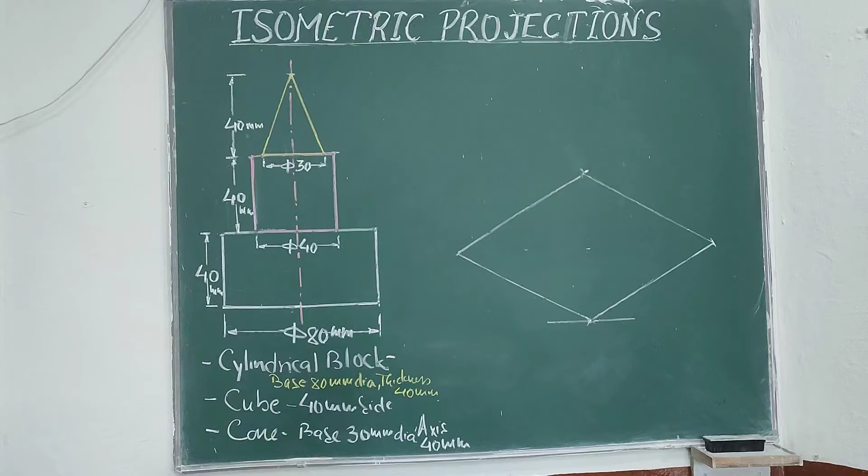Hello students, so here once again I am with another lecture on isometric projection. Again I am taking multiple solids. This time I have taken 3 solids, and if you look at this figure, this is the orthographic arrangement of these 3 solids. The lower side there will be a cylindrical block whose base will be 80 mm diameter and thickness I can say, because its height will be lesser than the diameter, so thickness will be 40 mm.

Above it I have placed a cube of 40 mm side, and above that cube there will be a cone of base 30 mm dia and axis 40 mm, and all the solids will be kept in such a way so that the axis of all the 3 solids will be on the same line, and that is perpendicular to the horizontal plane.

So I am going to draw isometric projection or isometric view of these 3 solids. If you want to go for isometric projection, then you reduce the length by 9:11. If you want to go for isometric view, then use the true dimensions. So I have drawn this front view only, and with the help of this front view I am going to put the dimensions on the figure.

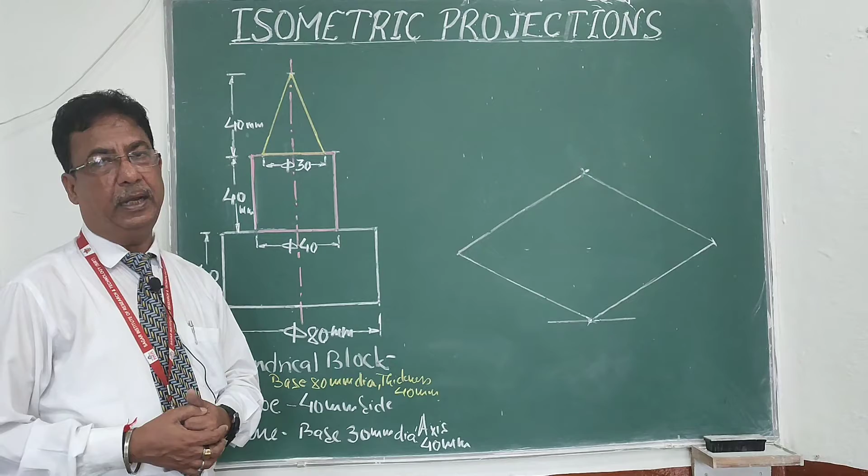As you know, we will start with the lower solid, that will be a cylindrical block, and the cylindrical block's base will be a circle of 80 mm dia, and that circle will be inscribed inside a square, and the isometric projection of that square will be a rhombus. So I should begin with that rhombus actually.

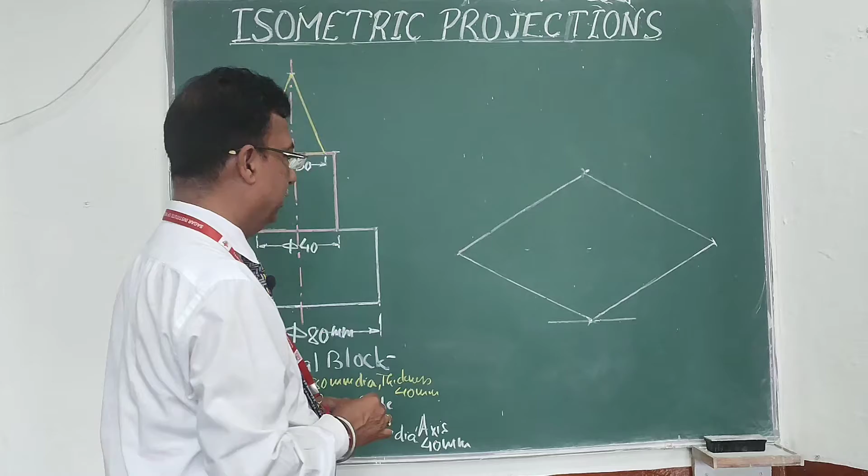So I have drawn that rhombus in this figure, and the dimension 80 mm I have taken from here, as that will be the top view. So I have used these two 30-30 axes, and with the help of this I have already marked this rhombus of 80 mm size. After that I am going to use one method that is known as 4 center method to draw the isometric of a circle.

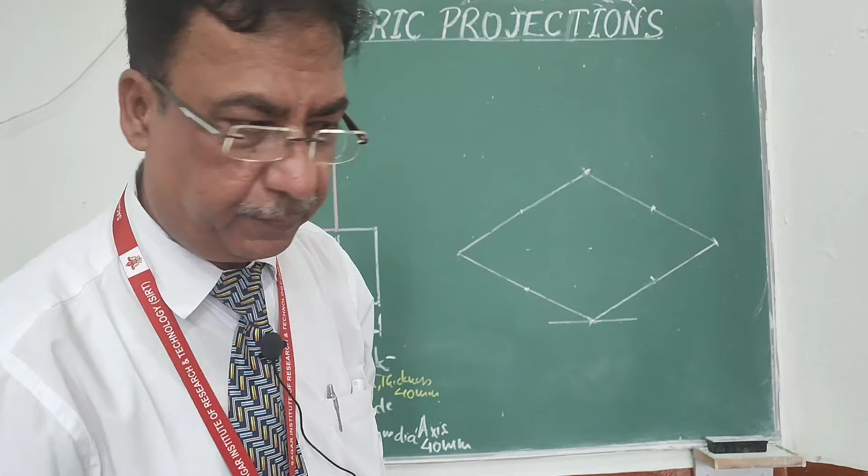So that method will be like this. Initially I am going to mark the midpoint of all the 4 sides of the rhombus. So initially I have marked the 4 midpoints of all the 4 sides of this rhombus. After that, from the corners of the shorter diagonal of the rhombus, I will join these points with the help of straight lines.

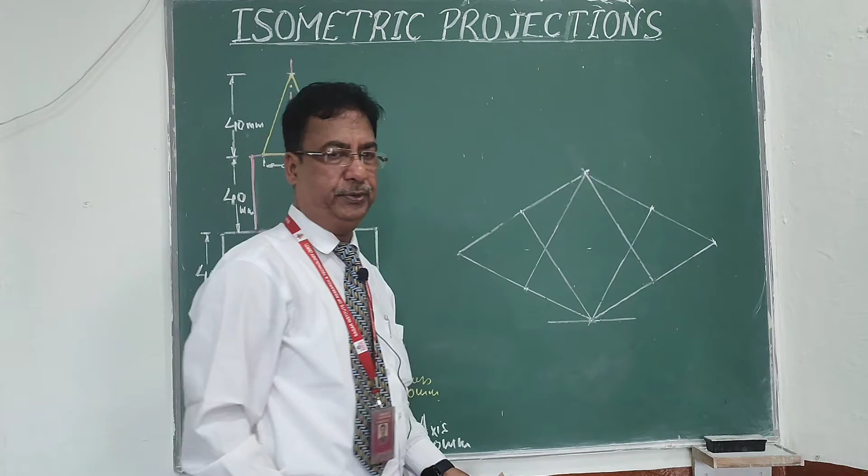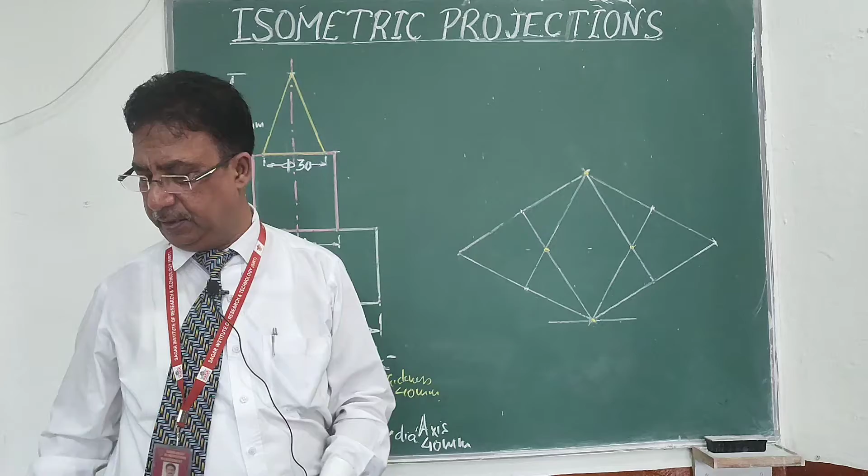This method is known as 4 center method. Actually we will get the 4 centers for drawing the ellipse, that will be the isometric projection of this circle, and the 4 centers will be like this. The first center will be this point, that is the corner of the shorter diagonal, and this opposite corner, and these 2 intersection points will be our centers. So 1, 2, 3, 4, these are the 4 centers, and with the help of these 4 centers I can easily draw, with the help of compass, my ellipse.

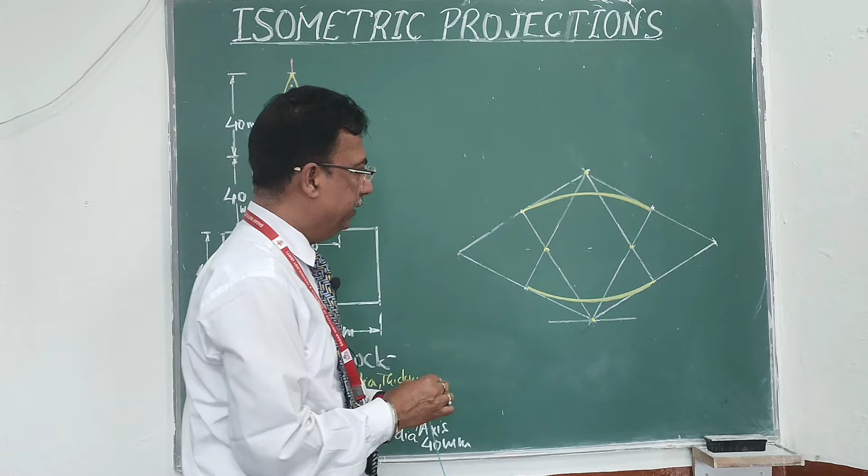Take the first center, and this total length will be the radius, and you know that this length will be equal to the opposite length. So draw an arc of this radius, that will complete this much portion of the ellipse. Same way from the opposite corner, this is the length, you can check both the lengths will be similar. So draw this arc. After that, this will be the third center, and this much will be the radius. You can mark this.

Now using the last center, this will be the center. You can easily draw. This is one of the easiest methods to draw isometric projection of a circle, that will be an ellipse. So I have drawn this portion. This is the upper part of our cylindrical block.

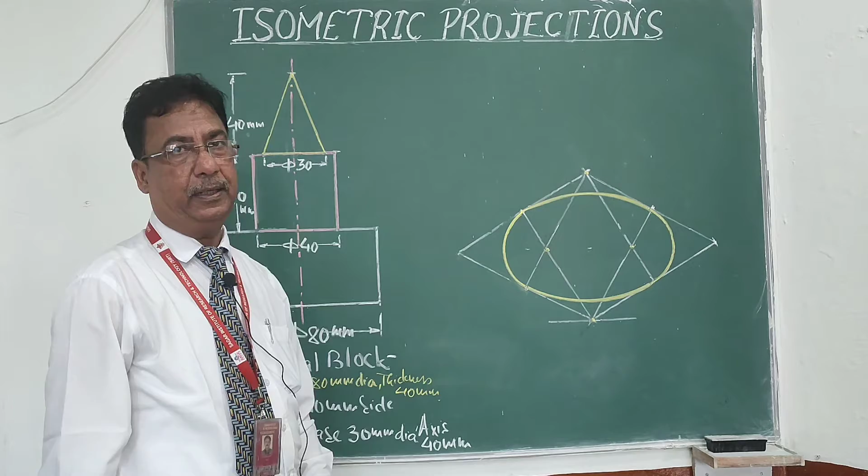Now for the lower part, either I can go depth wise and draw another rhombus, or because the height of the cylindrical block is very less, from these centers I will shift perpendicular downside 40 mm, so that I can get the center for the lower part. So from this center I will go downside 40 mm, same way from this center, and finally from this center. The upper 3 centers will be useful for me. I can shift downside and pick this length 40 mm.

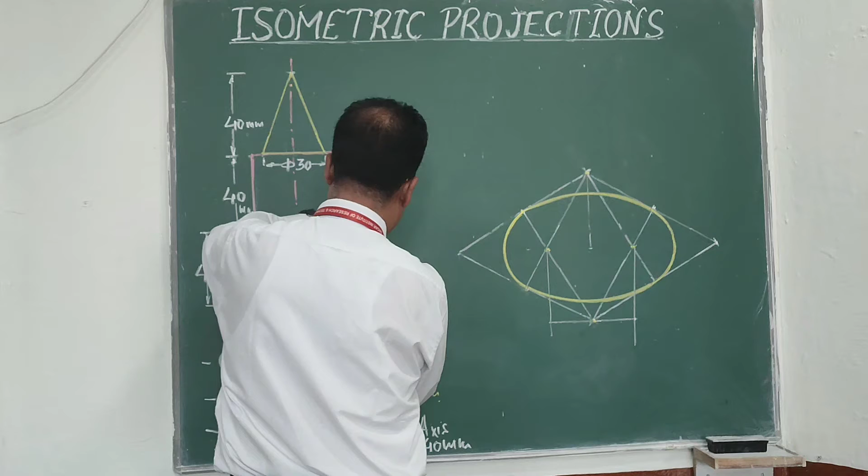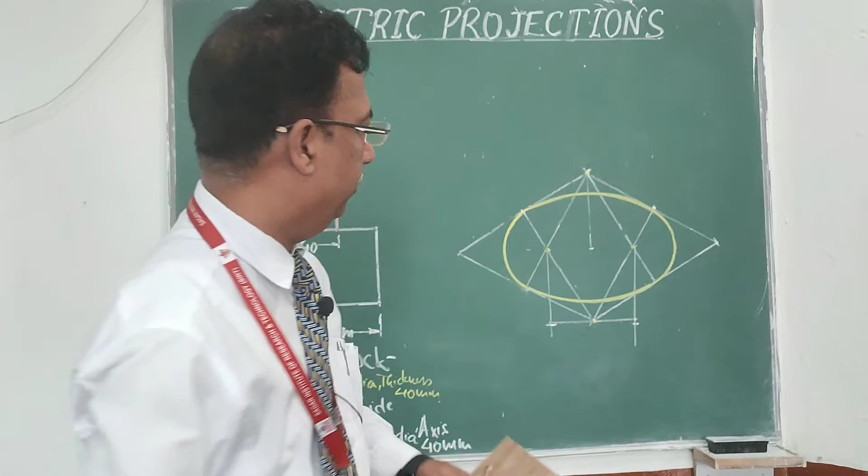So 40 below first center, second center and third center, and also as this curve will be from this point to this point, from this point you can shift perpendicular downside so that you can get the position of the arc.

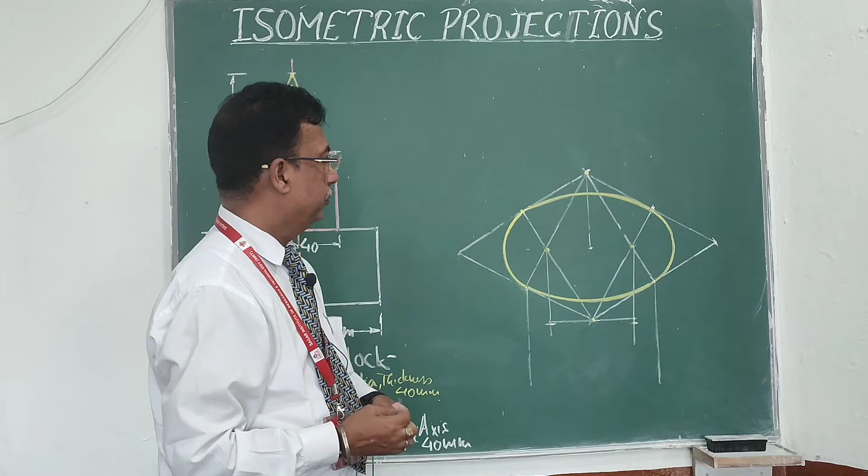Like this. Now I am going to use these new centers 1, 2 and 3. The radius will be the same as for the above curve. If you remember, we have taken this much radius. So from this center I will take the same radius.

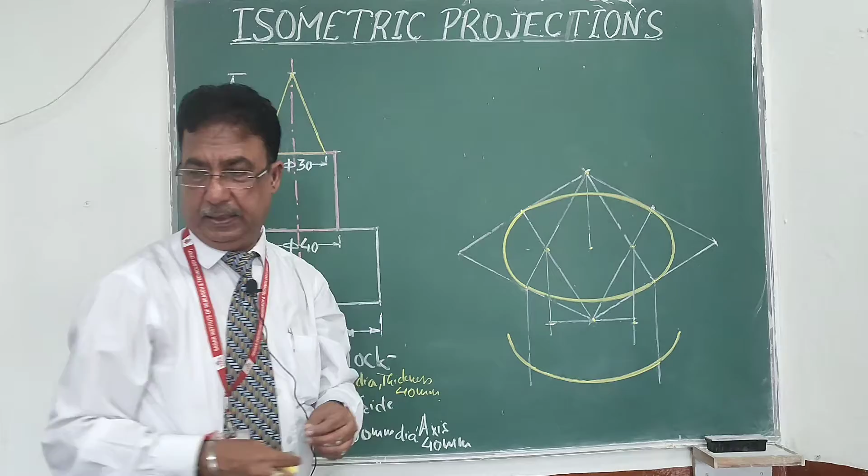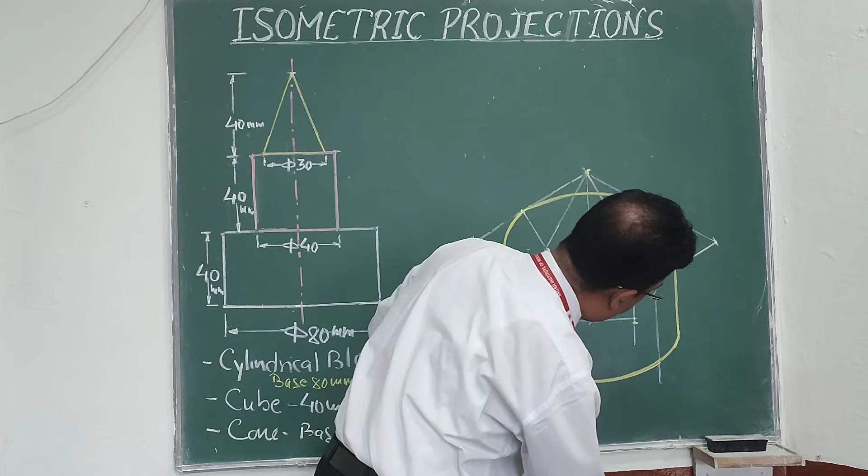Same way from this center we have taken this radius, so same way I can use this one. Same from the opposite side, you can go like this, and after that tangentially join this. No need to draw the dotted portion, as already I discussed with you. So this will be the portion of the cylindrical block. So now I think the cylindrical block will be completed.

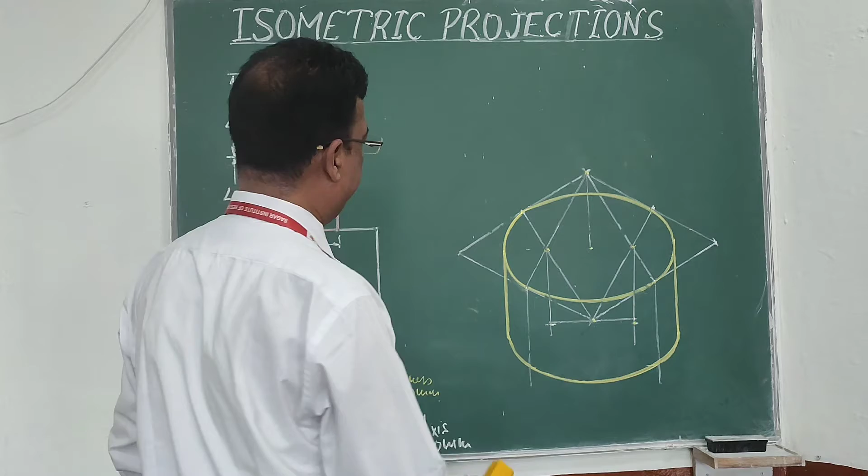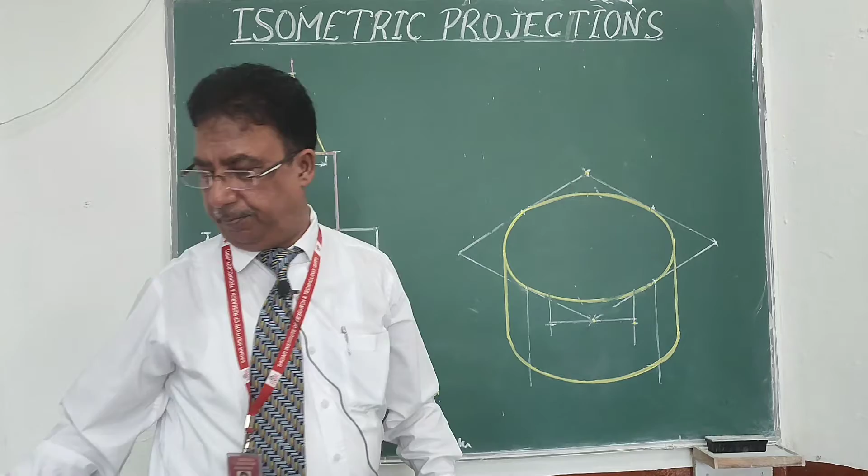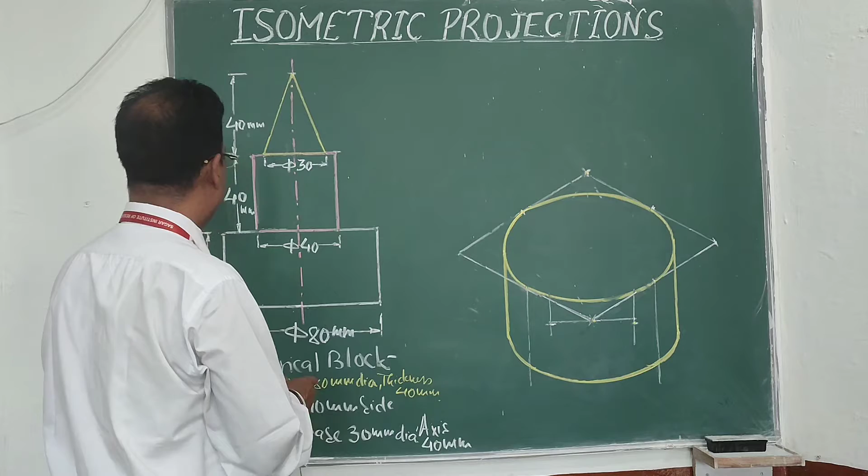So if I shift 20 mm inside the figure, 20 from this side, 20 from this side, remaining will be 40. Same way 20 from this side, 20 from this side, again 20 and 20, and 20 from this side also. So what I have done, from all these corners I have shifted 20 mm inside.

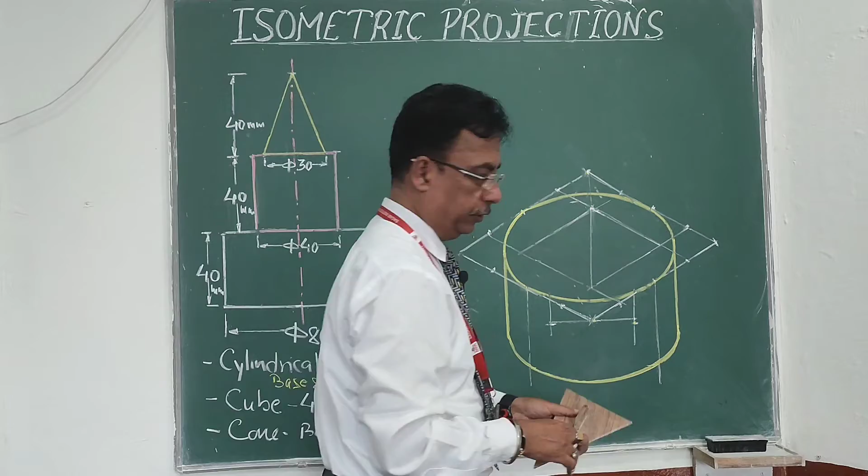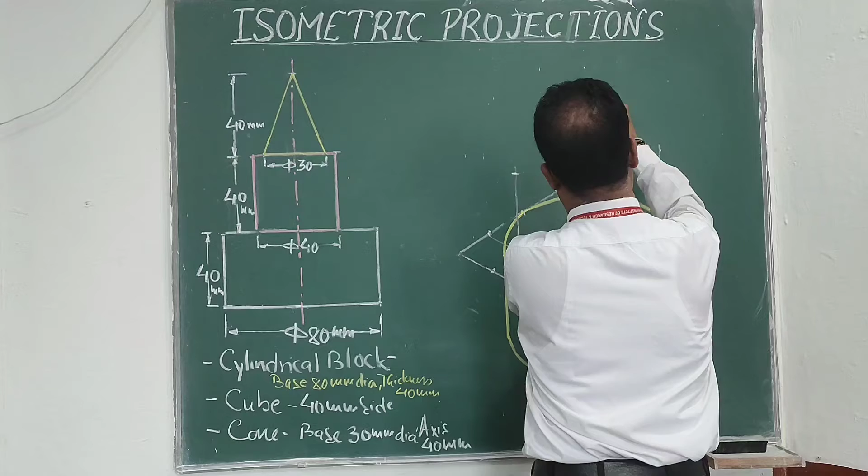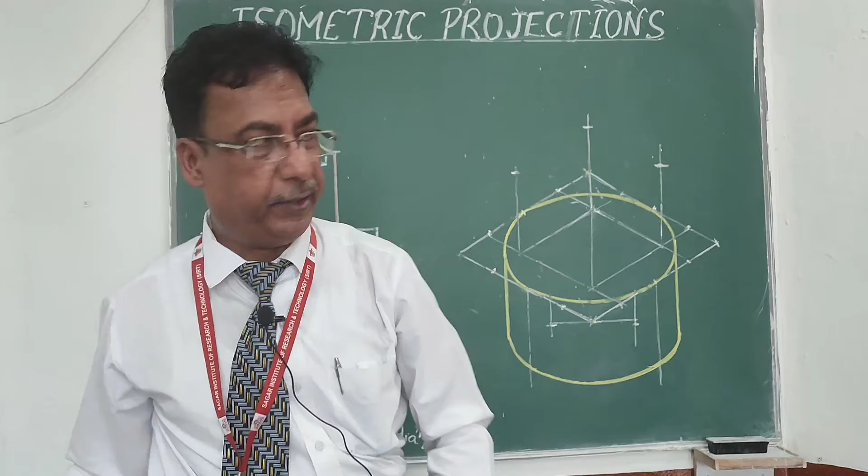Now here I can draw the rhombus for the lower part of my cube, like this. So I have drawn this rhombus, then I will give this height, so go upside again 40 mm. And if I join this figure, then this is the upper part of my cube.

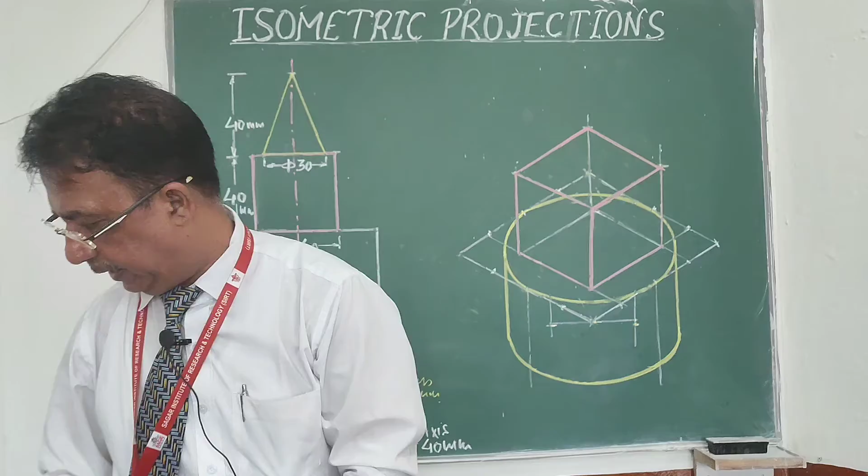Now darken those parts which are visible to us. So this is the required cube. Again, as already I discussed with you, if you rub the inside portion, the figure looks much better. So I will rub this portion because this is not visible; the upper solid will hide this portion. So I am removing this. Now look at this figure. Now the cube will be exactly placed on the center of the cylindrical block.

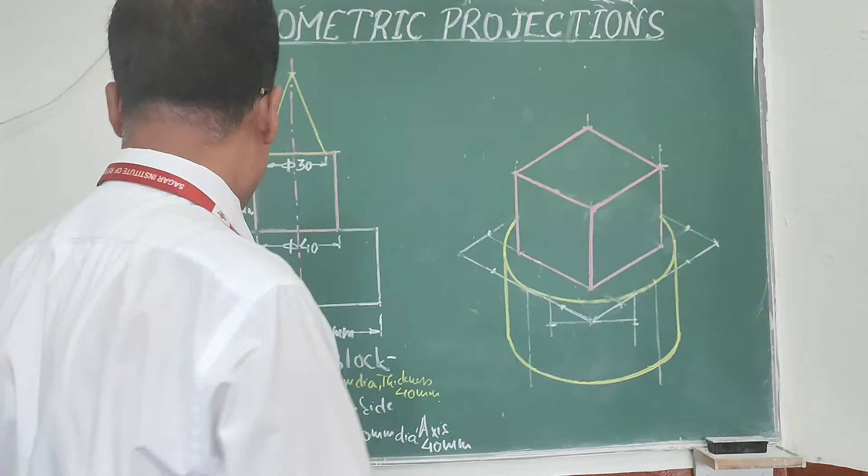Now above this, I am going to keep a cone of 30 mm base diameter. This is 40, so 30 means if I shift 5 mm inside: 5 mm, 5 mm, 5 mm, and finally all the 5 mm points. Now again I can draw a rhombus inside this rhombus. This is the easiest method to draw a rhombus inside a rhombus, by shifting just inside the figure. And if you want to check, all these points should be in the same line. It means we have drawn properly. So this is the rhombus.

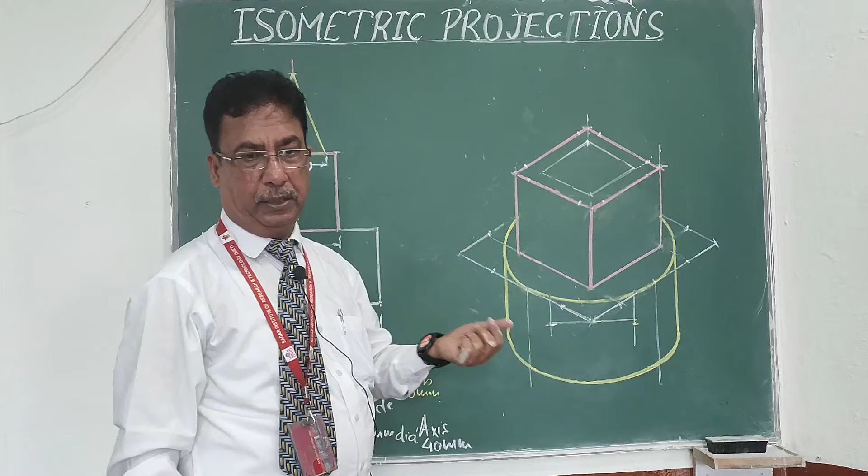Now in this rhombus, this is the lower part of our cone. The cone's base will be a circle of 30 mm, and that will be a 30 mm rhombus. Now again I am going to use the 4 center method by marking the midpoints of all 4 sides of this rhombus, and then join those points with the corners of the shorter diagonal, in the same pattern as earlier. Again I can get the 4 centers: center number 1, 2, 3 and 4. Again use these arcs.

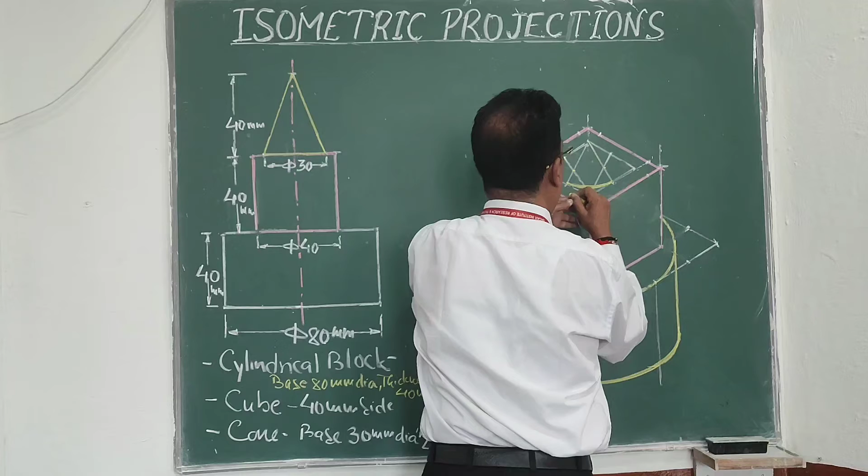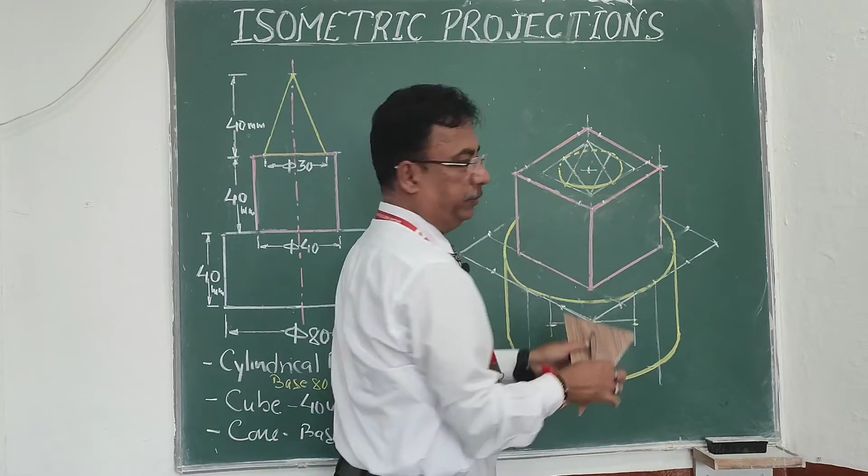So this is the lower part, then this part, then again the same way this small arc. And if you want to draw the back side portion also, that will be in the dotted form. So this is the lower part of our cone, and the height of the cone will be 40 mm. I can mark the center of this rhombus, this point. From this I can go upside 40 mm on this axis. So this is the point. Join this with the rim, and that is the required cone.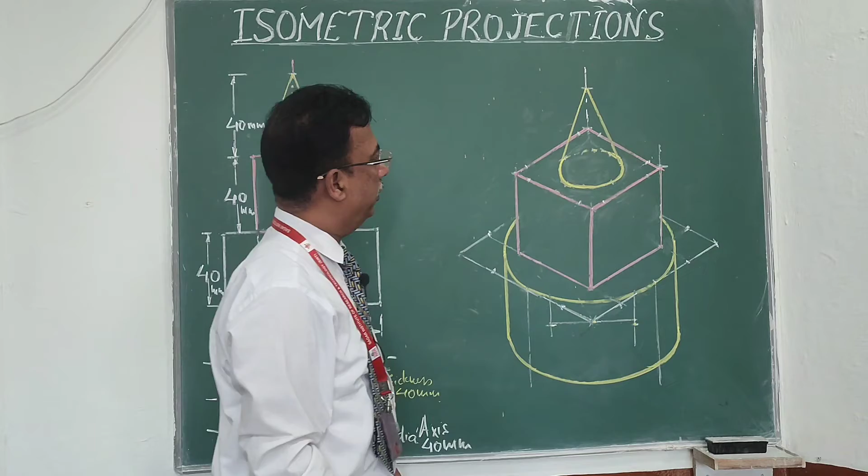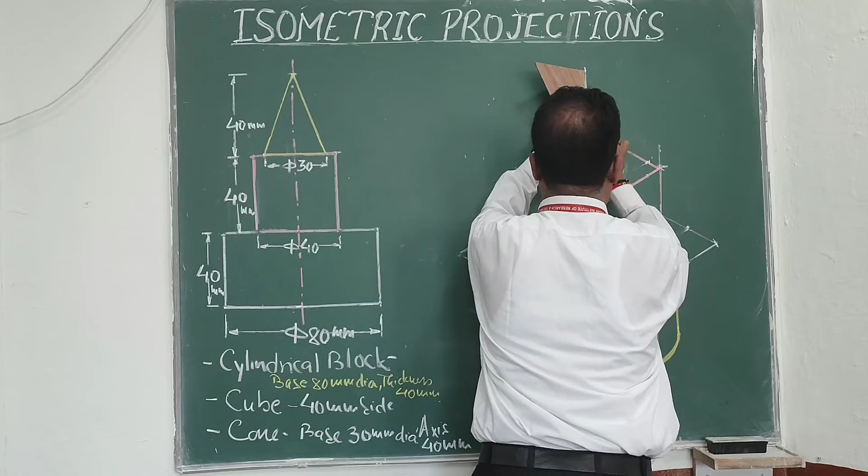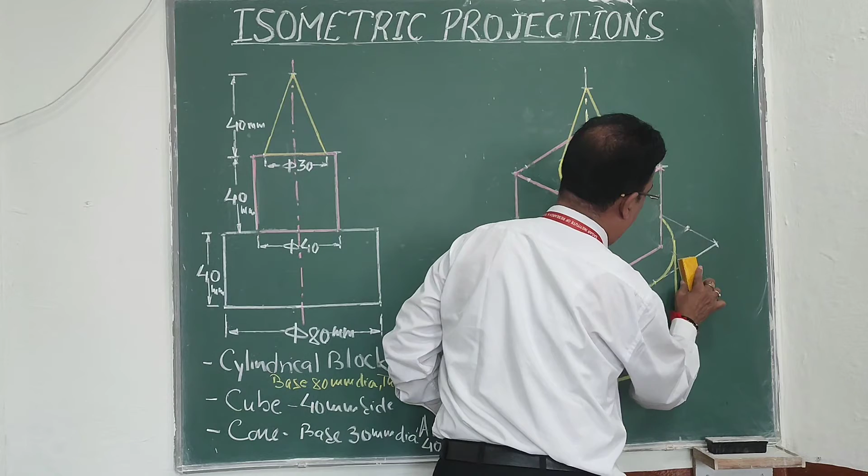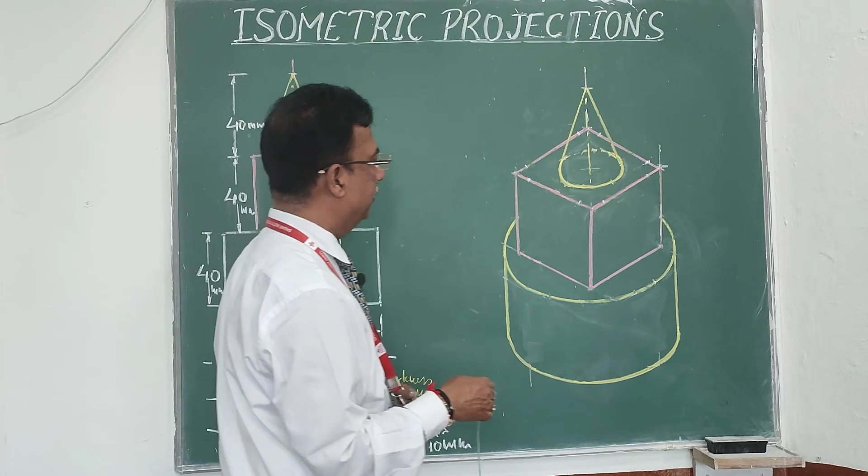Now look at this arrangement. This is the required arrangement of the solids. So there will be a cylindrical block, above that a cube of 40 mm side, and above that a cone of 30 mm base and height 40 mm. Keep the construction work very light, or you can also later on remove that part. So this will be the required solid.

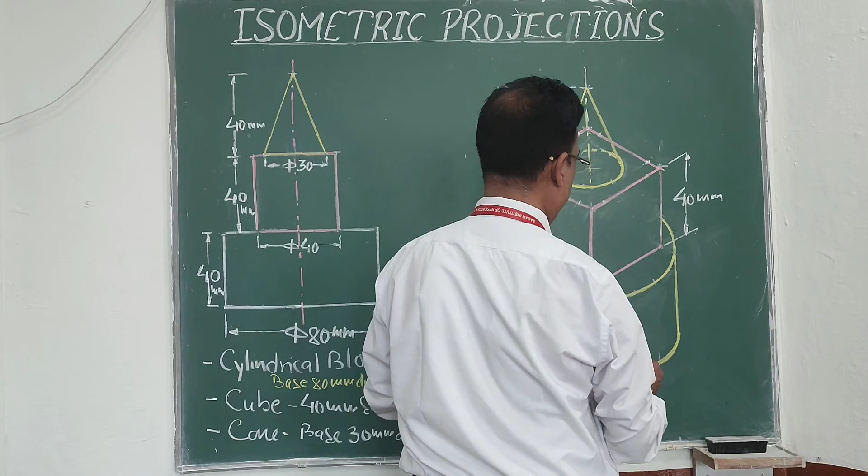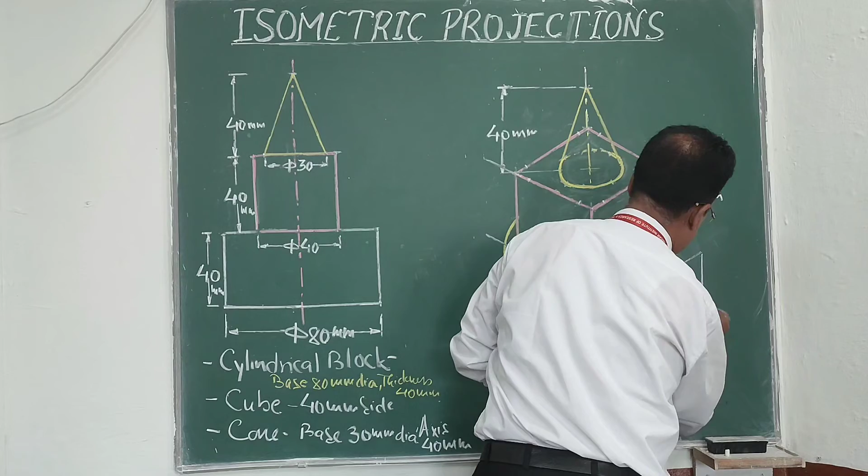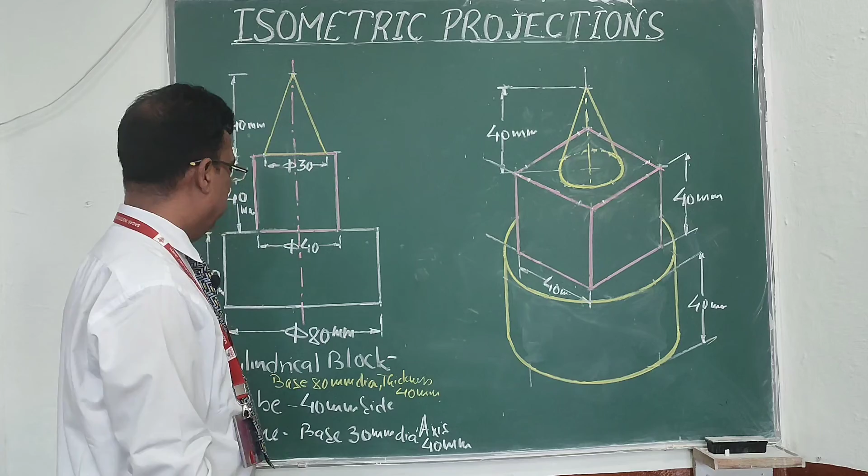Now if you want to dimension the figure, as I already told you, we can dimension along these 30 degree lines. So here I can get the height of the cube, that is 40 mm, the height of the cone, this is 40 mm, so you can dimension the figure also. So this is the arrangement of this solid, that is a cylindrical block, cube and cone placed one above the other. I hope you understand the problem.